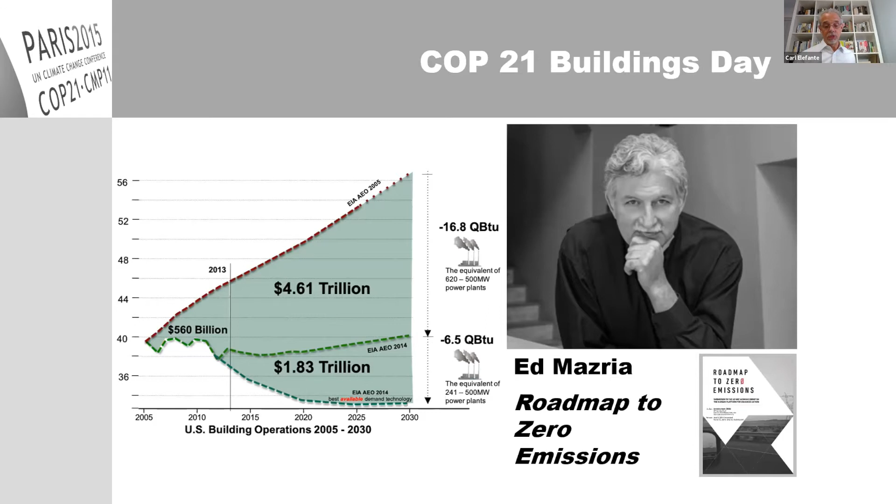It's also familiar to us at this point what the importance of the building sector is, in both direct contribution to greenhouse gas emissions and all the many associated aspects. My own perspective is that if the building sector is responsible for 50% of greenhouse gas emissions, the civilization we operate is responsible for 100% of it. Since the building sector is such an important part of shaping that civilization, we're really responsible for 100% of these global emissions. Let's work together to address all of them.

The other thing we came away from Paris with is a very clear idea that the challenges we're faced with in the building sector are very understandable, very straightforward, and very resolvable. We know what we need to do.

These three actions: using renewable energy for everything, understanding the carbon emissions from building operations, and the carbon emissions from building manufacture and construction, it's very straightforward. We're really getting a good understanding of each element of this. I'm going to talk about both operational and embodied carbon and renewable energy as we get into the specifics.

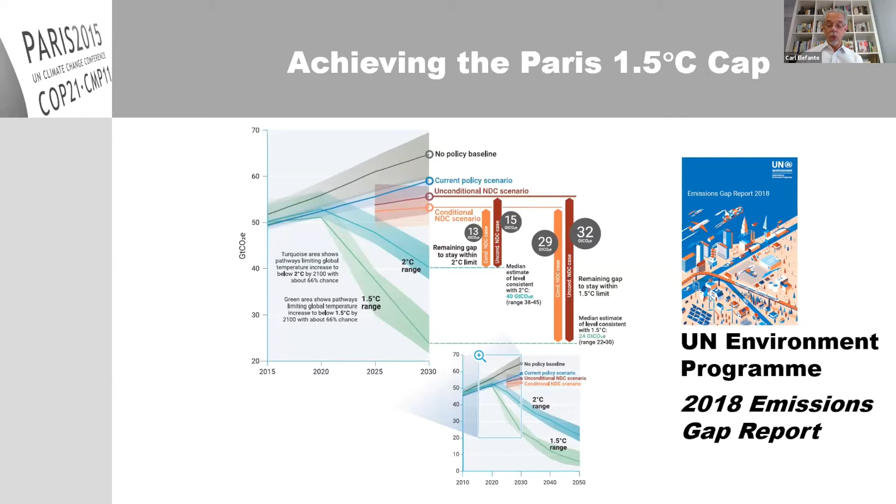Last but not least on Paris, we also understand that as we're going to COP26 next year, we are faced with this reset moment—that the goals established just five years ago are not ambitious enough, and that we must do more, and also that we can do more.

As a building reuse person, I want to spend the next few minutes talking about the importance of reusing buildings and the opportunities that are there.

I'm going to start with a project I worked on with my colleagues at Quinn Evans that is a poster child of a beautiful historic building—the National Academy of Sciences building in Washington, D.C. What does this have to do with climate action?

And the answer is: as much as any other building. So we had the incredible opportunity to really renew this building.

It's in its 100-year renewal cycle. Part of that was creating new spaces in what were empty courtyards that were pretty low-quality spaces, turning them into useful courtyards capped with skylights, and in those skylights are integrated photovoltaic panels and cells.

This may seem like a small gesture, and in many ways it is, but for the last 10 years this is where many of the climate scientists come and have conferences in the United States. At every one of those conferences, during their breaks, those climate scientists are standing in spaces that are sending the message that historic building and existing building renewal is part of the climate solution. It's an important message, one we need to send with every building we work with.

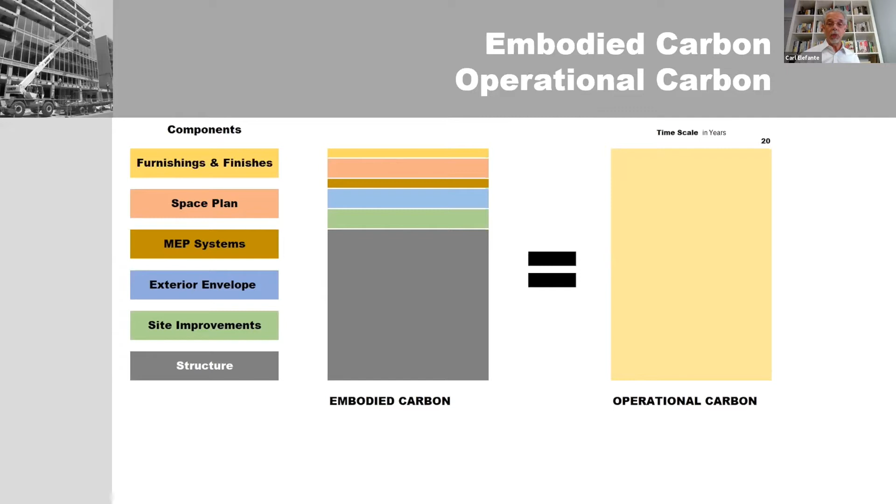As those of us who have been paying attention to Architecture 2030 over the years understand, with conventional construction techniques and conventional building operation performance levels, embodied carbon and operational carbon over about a 20 or 30-year period are about equal. So they both must be addressed—they're both important parts of the solution.

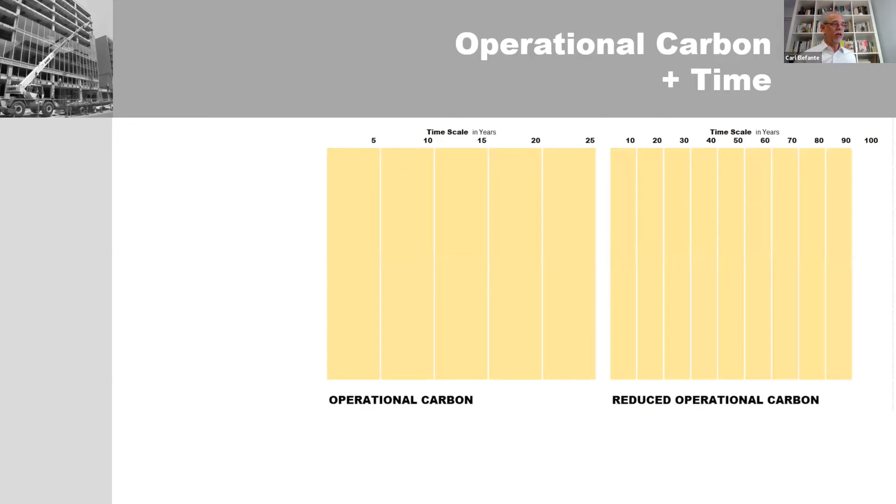From the operational side, we really understand the time scale and its importance. As we move through time, we are expending more and more carbon. If we create buildings that are more efficient, they expend that carbon more slowly. The time scale aspect of operational carbon is very well known and very important—it's the gift that keeps on giving. That efficiency is enormously important.

But somewhat less understood is that embodied carbon also has a time scale dimension. When we build buildings, they're a complex assemblage of many parts. Some of those parts are extremely durable—for example, the building code will require that you build a structure that is earthquake-proof, fire-proof, storm-proof, and so on, literally built with materials that will last for hundreds, even thousands of years. What do we think of as we design elements that will last for such a long period of time?

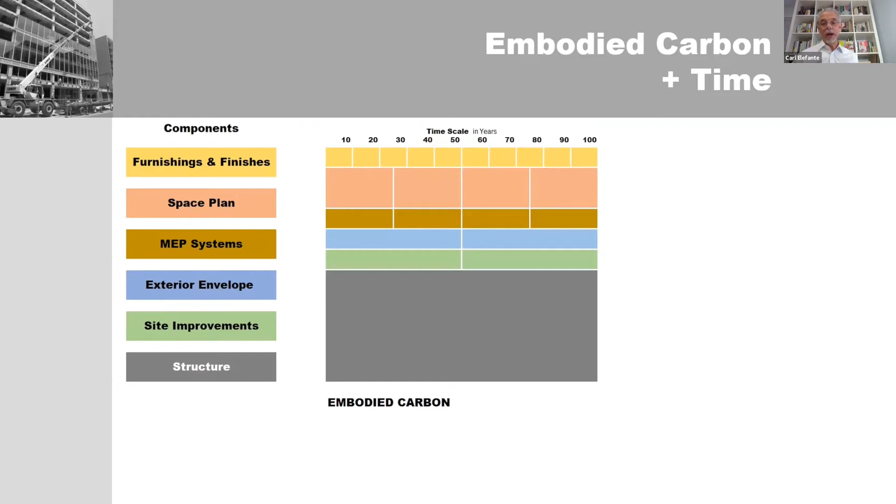Do we really design that into our life cycle thinking? And do we understand the renewal cycles of buildings? This is the time scale that pieces of buildings require—some need relatively constant, routine attention, while others require attention much more episodically. Over the course of a 100-year life cycle, there are many investments of embodied carbon that happen. So the time scale of embodied carbon is also something that we can and must design with.

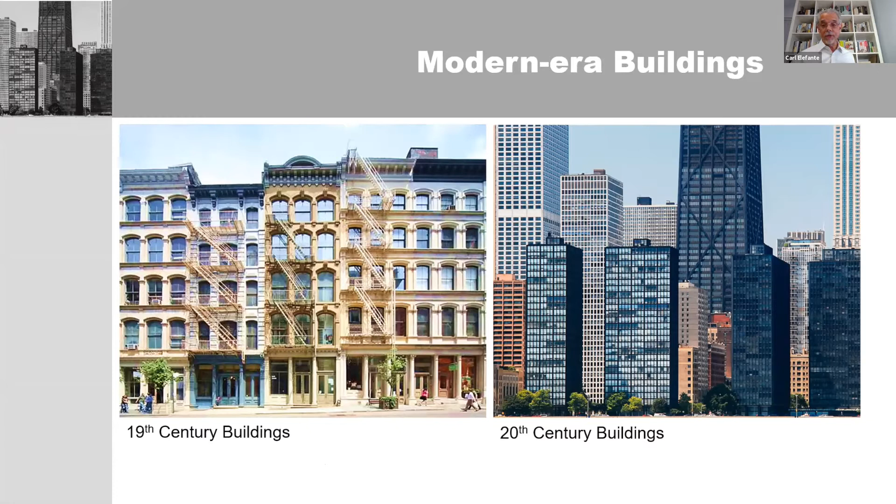So what about those modern era buildings? What are their characteristics? What will it mean for us to be responsible for renewing and continuing to benefit from the embodied carbon investments in those buildings? They're very different from traditional buildings, and in fact have received quite a bit of criticism about their lack of performance. My own perspective, having dealt with lots of 19th century and even 18th and some 17th century buildings, is that an awful lot was advanced in the modern era, but an awful lot was also forgotten.

For example, sealed buildings where you can't even open a window on a nice day. And certainly the coronavirus pandemic has shown us that there are some assumptions about depending on buildings and building systems to operate the way they're designed that creates a lack of flexibility. So these modern era buildings present some real challenges to us.

I particularly underscore the importance of getting our arms around this today, because we're beginning to see large scale demolition of modern era buildings. I have to say I think it's just terribly wasteful and completely unacceptable. When we look at the embodied carbon impacts, I hope you'll understand why I think it's a kind of criminal negligence to waste buildings that have investment that will last thousands of years, tearing them down in decades.

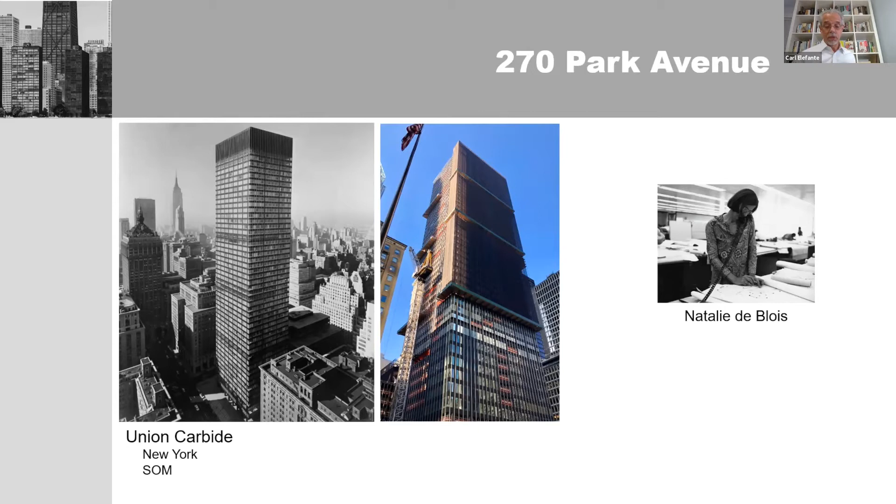So what can we do with those buildings? How can we repurpose them? The reskinning and renovation of them are really important elements. This is a typical Washington, D.C. modern era building intervention. In the preservation world, many people would look at this and just shake their heads and say, oh, that's not a good approach. I would argue that actually it's a very good approach, and that it's quite sensible dealing with the realities of modern era buildings. So what do we see here?

We see a building that has been stripped of its curtain wall, its skin, basically gutted on the inside with all the partitioning and systems removed, and then all of that replaced with a new generation of material. If we go back to that embodied carbon life cycle diagram, you can see that this is actually, in a way, true to the life cycle expectancy of those elements—that for the curtain wall to still be working 50 years down the road is pretty much an expectable life cycle.

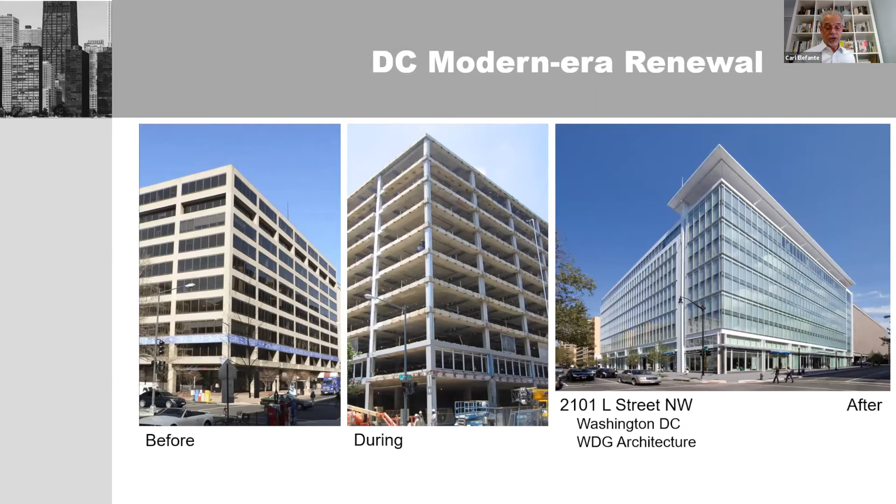This is a Quinn Evans project in Detroit, Michigan. It's a kind of typical mid-century modern, almost a ho-hum example of a mid-century modern tower. Our firm repurposed it for housing, took an office building and turned it into housing. On the site, minimal work was needed—the structure was kept, requiring very minimal work. The skin was essentially needing everything.

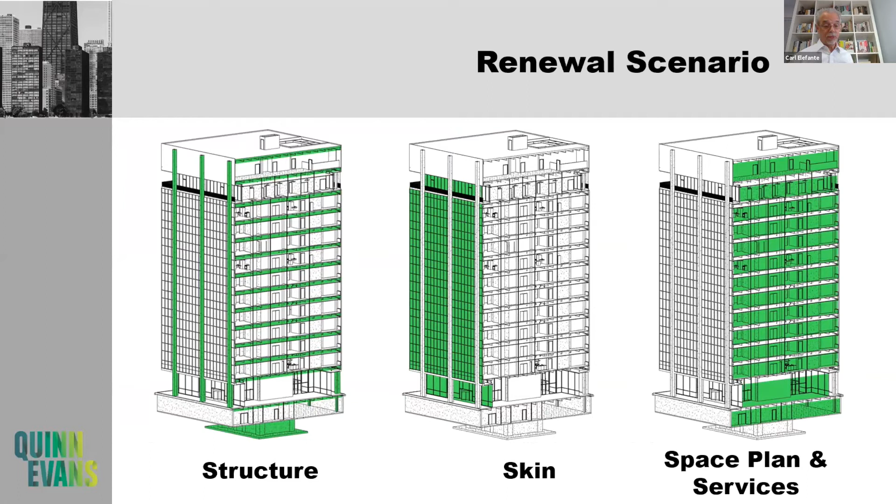So what you see here is basically a pretty typical formula: the structure is retained, the skin is either upgraded or replaced, and then the interiors are refurbished to make them worthy for whatever the new purpose is. The embodied carbon footprint here—think of this as an investment in repurposing the building, and also an investment in improving the operational performance of the building.

What you can see here is that the replacement of the skin is a relatively small embodied carbon investment. In terms of the kg CO2 equivalent, it's under 400,000. And by comparison, more than double that—about 2.5 times—is the embodied carbon footprint to redo the interiors with all the new systems, lighting, et cetera.

What I really hope to convey here is that just by keeping the structure—just the structure—that sounds like, oh, what an empty gesture. That's actually more than double an additional carbon investment footprint that would be needed if we didn't keep that. So I hope this gives you a sense of both the qualitative and quantitative aspects of why finding ways to reskin, repurpose, and renovate these modern era buildings is so important.

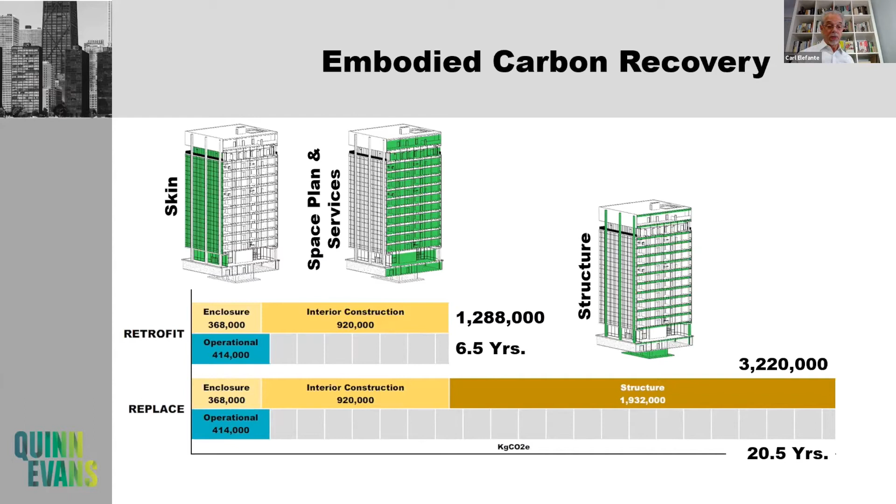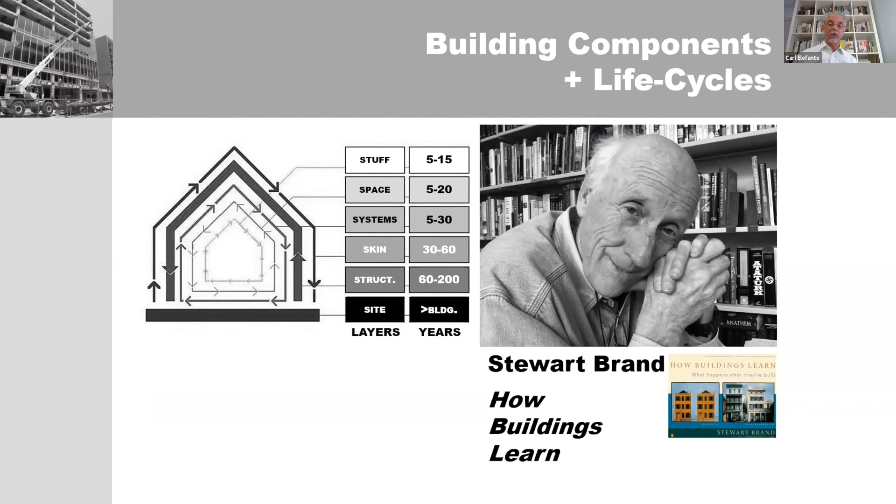I just want to end with a little more about how we actually do this, and what both the thinking and practice is that goes behind it. I want to underscore the importance of understanding that buildings are multiple assemblies—complex assemblies of many different systems. We need to understand the life cycle of each of those and optimize the life cycle of each of them. The good news is that the tools are here.

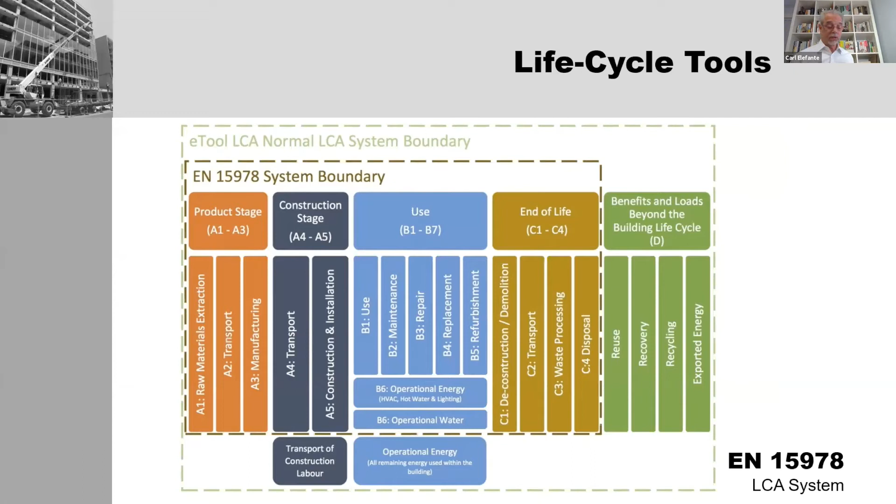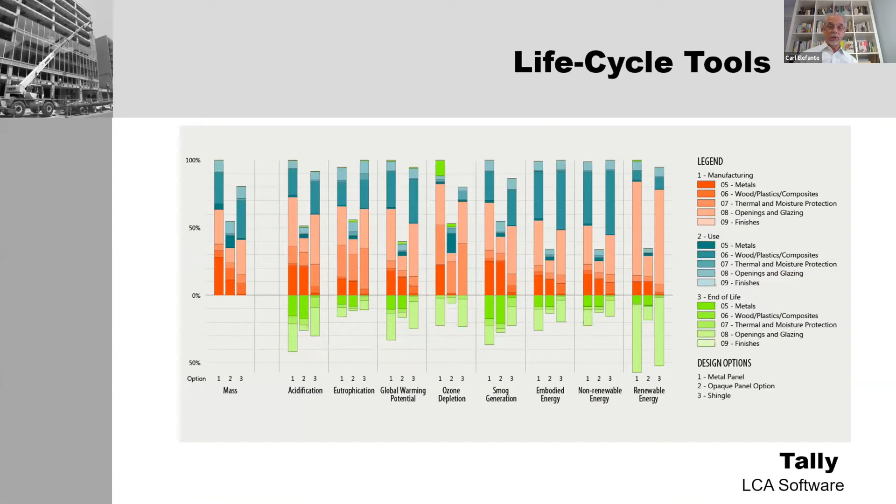The protocols, if you will, for understanding how life cycle really works and what the impacts are of bringing materials to market, using them in buildings, and then maintaining them and even removing them at the end of life—we understand how the life cycle impact really works over time. We also have the tools that allow us to do the necessary analysis to really understand our choices and their impacts over time.

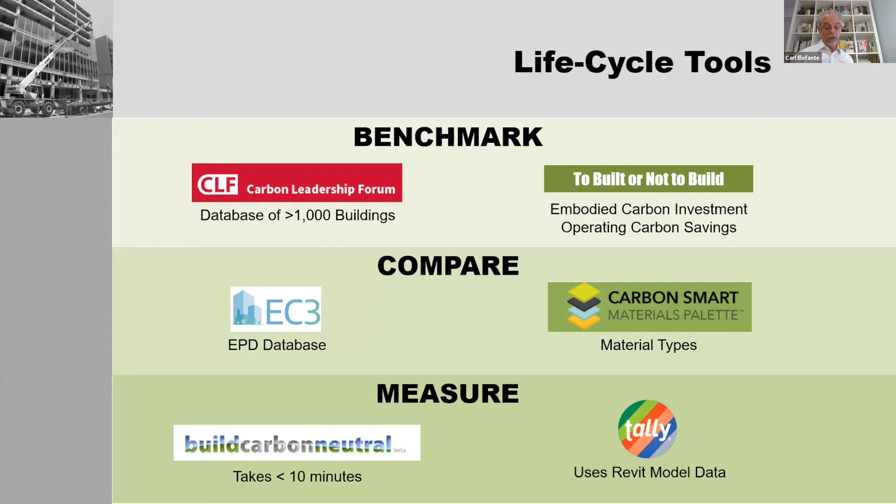I won't go into detail of all the many tools that exist, but there are ones that serve many purposes: to understand how to benchmark, how to compare and understand our choices, and then ultimately to measure the performance of our design proposals.

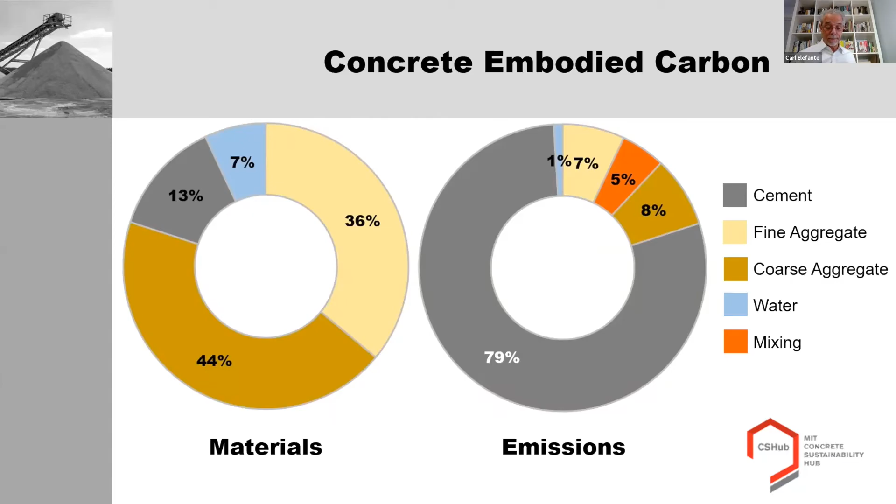So how far does this go? Is this really a paradigm shift that informs us about how to think about buildings differently? I think the answer is yes. It's really bringing two movements together: the environmental movement, and the understanding that preserving the built environment, the stewardship of it, was literally a movement from the 60s, just as the environmental movement was. What it leads us to, I would submit, is that we really have to understand how to value each and every building.

This is another project of ours from Detroit. The before pictures show an abandoned building that doesn't even have a roof anymore, windows all broken out. It's a mess. But we have to learn to love buildings like this. Do they really have value? The answer is yes.

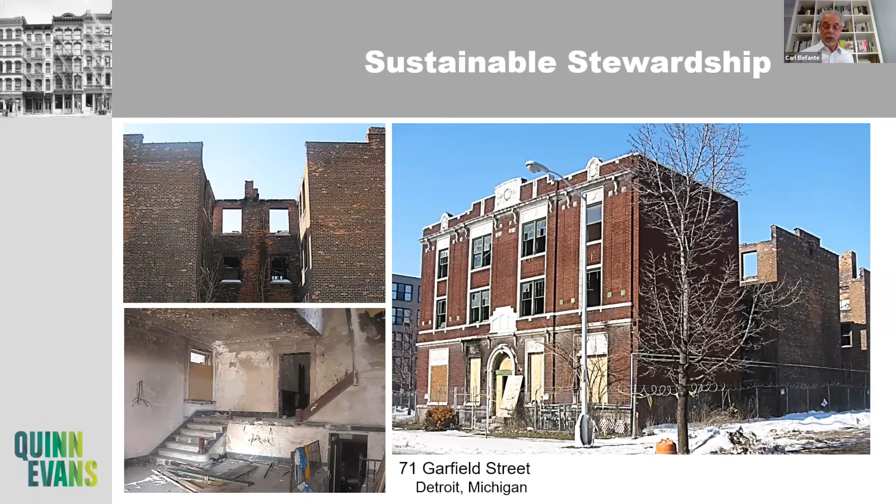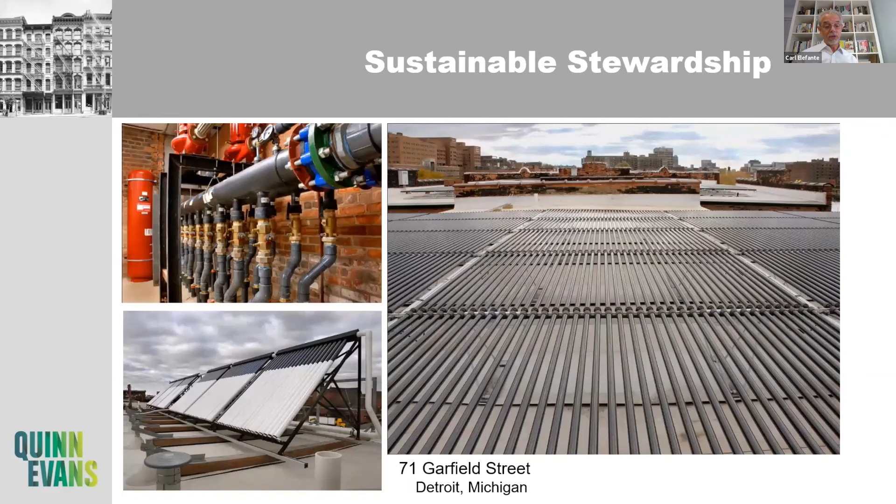Also, these buildings can be green buildings just as much as new buildings can. This building's whole roof is covered with a solar array, ground source heat pumps, et cetera. Existing building rehab and repurposing can be green just as much as new construction can.

There's one other thing I want to point out: our version of what it means to do green building today tends to be very, very heavy on the importance of technology. I accept it, I understand why we have such a fascination with it, but I'd also simply point out that it's not the only way to be, not the only way to design.

This is my candidate for the greenest building I know of, the Pension Building in Washington, D.C., 1887, designed by Montgomery Meigs, who also contributed to the Capitol Dome design. This building works with passive—which is absolutely the wrong word for it, it's very active—passive ventilation, passive daylighting, things built into the inherent operation of the building.

Open some clerestory windows at the top, open your window, and through air stratification there's natural ventilation that works through the whole building.

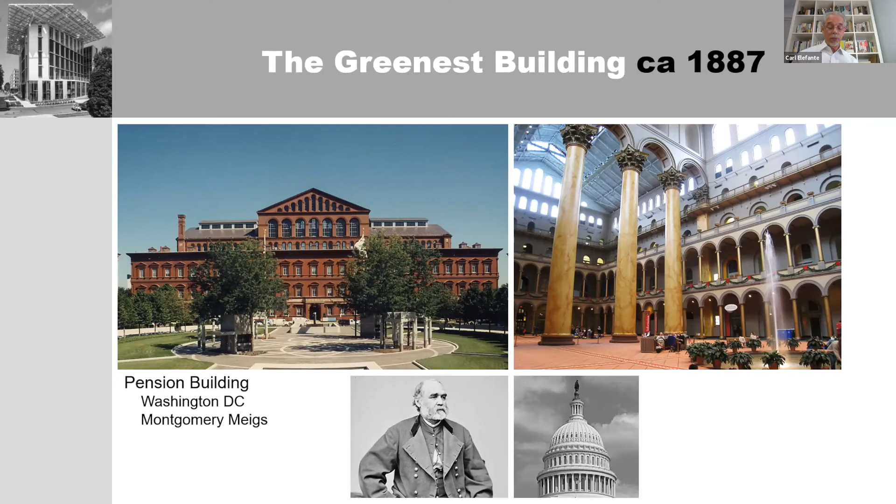I want to end with the kind of Kennedy idea: let's embrace this and understand that this is an opportunity for us to make a better world. Just a few months before the Paris summit in December 2015, there was another UN meeting, the Sustainable Development Summit, that established the 17 Sustainable Development Goals.

Shortly after the Paris Accord, about six months later, was the Habitat 3 Summit in Quito, Ecuador, where the New Urban Agenda was adopted. So the Paris Accord fits right in, bookended by these two other similar efforts that let us know the world is becoming an urban world.